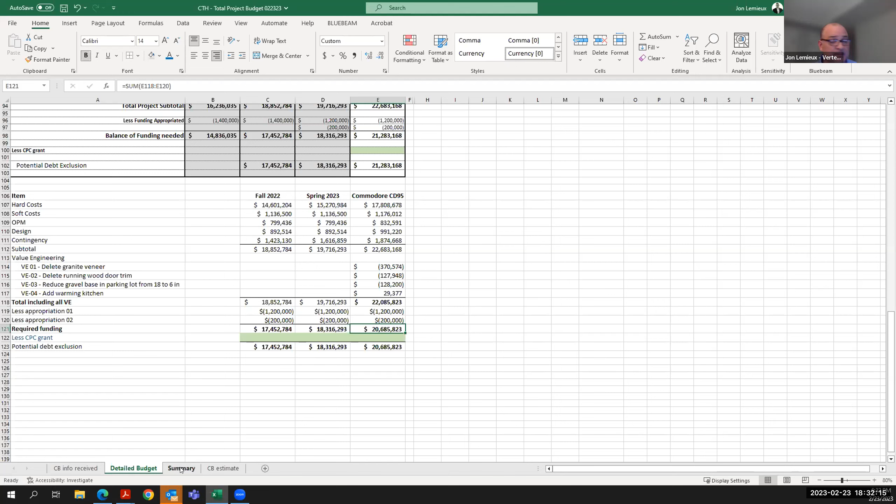So what I'm showing here is what was presented last time to the select board, just for reference. Again, this information is from the prior page. We just went over it, but I want to show you, well, how do we get a number for CPC?

Well, what we told Commodore to do is give us a breakdown, and we have the backup for this. Give us a breakdown for all of the work that is on the historical side of the building, and for items that are shared services, all new electrical, all new HVAC, all new plumbing, break it down by square footage. If there's 40% of the square footage in the old building and 60% in the new, take 40% of that electrical cost and put it with the old.

We're not going to count fixtures and wire, because if the panels are in the other building, the panels serve both. Similarly, if we're housing a big air handling unit in the existing building, and it serves the new building, we shouldn't be lumping that in entirely with the old building, even though it sits there, because it's providing heating and air conditioning to the other side.

So we did the systems of the building by square footage. In doing so, this is the $5 million number that we saw for the estimate on the prior page. That $5 million number is 33% of the $17.8 million construction cost. So the renovation portion of the historical building is 5.9 million.

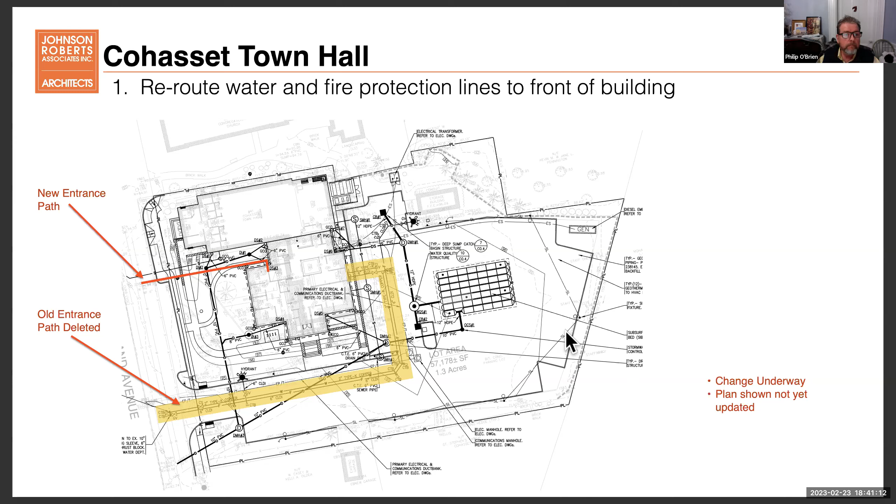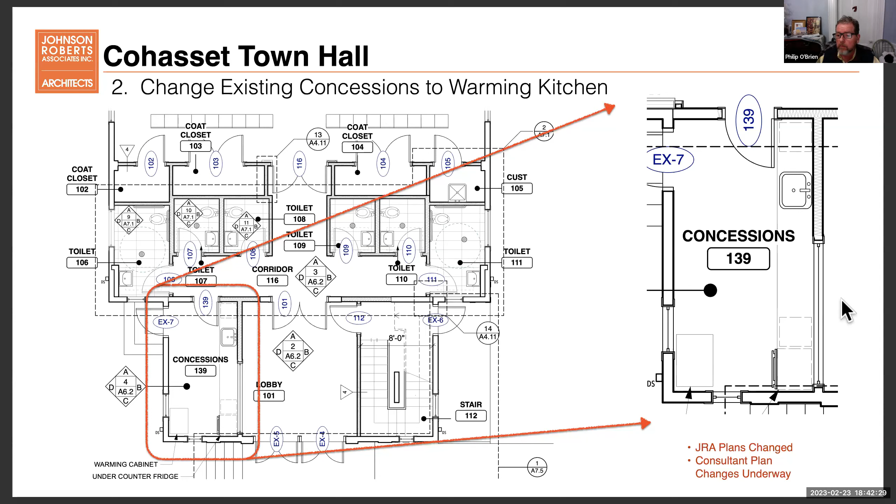This door basically just steps out - we weren't using it as an exit door anyway. It will provide a way for folks working in here, potentially delivering foods and warming things up to service, to sneak in and out this way if they needed to. We've got a sink in there, moved away from the windows, and a spot for a warming cabinet and an under-counter refrigerator. If you wanted a full-size refrigerator, you could put it up against this wall, and we'll have outlets in that room. So that's underway - our engineers are working on their portion of it.

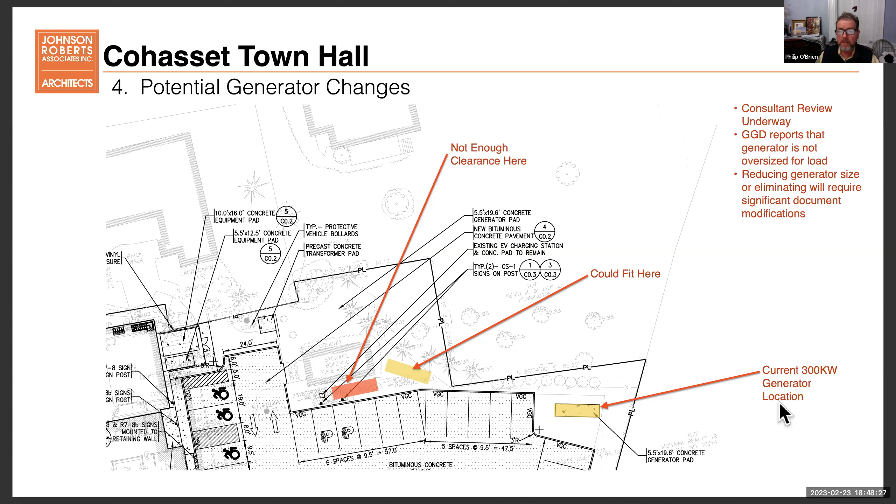They said it's not over-designed, so if we went down a size, it wouldn't make a big difference in terms of the cost. That hasn't been confirmed by Commodore, but they would have to remove some things from the emergency generator and redesign the electrical and emergency electrical systems in order to accommodate that. So that's the response we get from them.

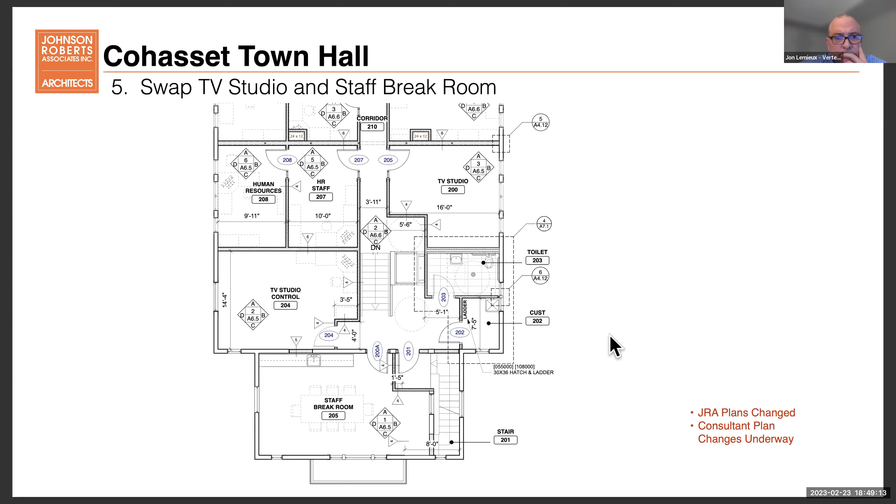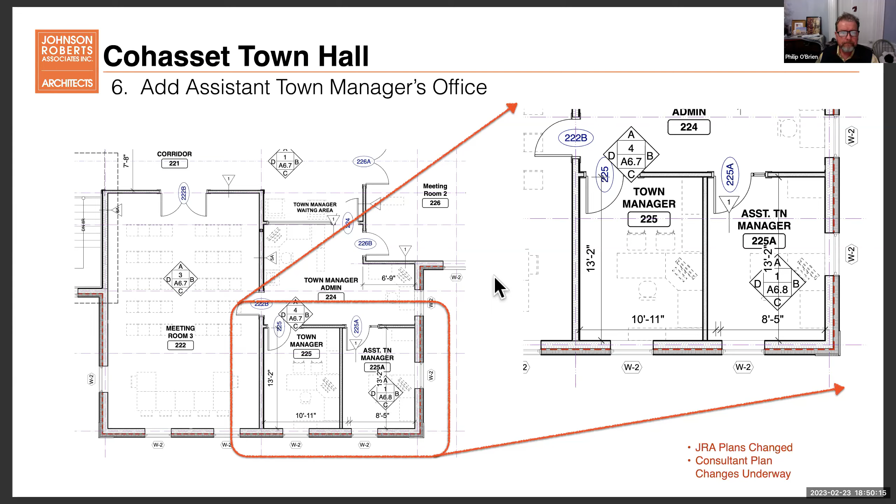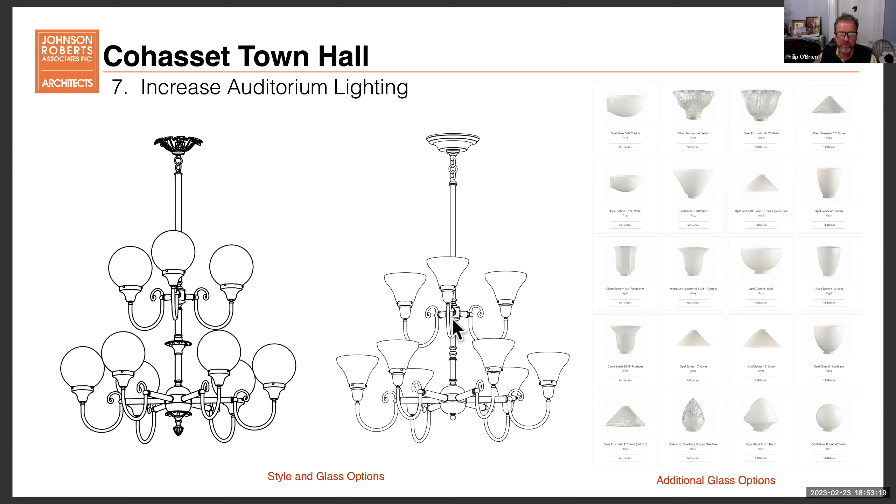I have one more slide to show you the different glass options. One of the nice things is that you don't really need to pick the glass options right now. There's a couple of different style variations, a little bit more fancy on the metal work here, or a little simpler form. They're basically variations of the same thing, and again, they come in a variety of metal finishes, including bronze, which is, I think, one person suggested.

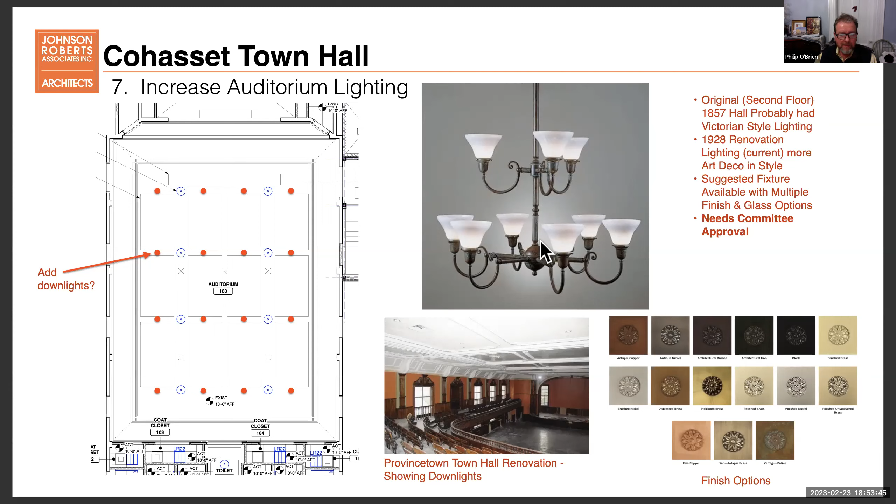And then they have kind of an heirloom brass and a distressed brass. We could get physical samples of those things during the submittal phase to show those to you if anybody's interested. But again, this is one of those things that we need the yay or nay on so that we can get it onto the documents.

John mentioned this one, and we talked to GGD, and we've gone over this before. The idea here is there's your pavement, and the new base shown on GGD's drawing is 18 inches deep. They're saying that based on what they know right now, they could easily reduce it to 12. It doesn't need to be 18 inches, so that was a good catch.

But depending on what's under that existing parking lot, they agreed that they might even be able to just regrind what's there and use that as a base, which would save you more money because you wouldn't need to excavate down all that much other than to change the grade, and you could reuse that material and move it around. So you'd be doing a lot less excavation and removal and replacement if that is possible. We need a little bit of additional information to nail that one down.

These 5 items, I don't have drawings or illustrations to go with, so I've taken them out of order a little bit, but basically John talked about eliminating the granite facing on the foundations. That's kind of a no-brainer. We've done that. The details will stay there, and they've priced it as an alternate, and if everything comes in great and you want to go ahead with it, we'll have the number for that. We'll also have the number for not doing it.

Changing the doors and the locks to keyless entry, we are making the changes to the doors, frames, and hardware. The electrical change is basically box and conduit, the way it is for all of your other electronics, assuming that the electronics themselves will be added at a later date, and we'll have everything there with pull strings so that stuff can be pulled in, just like security and so forth.

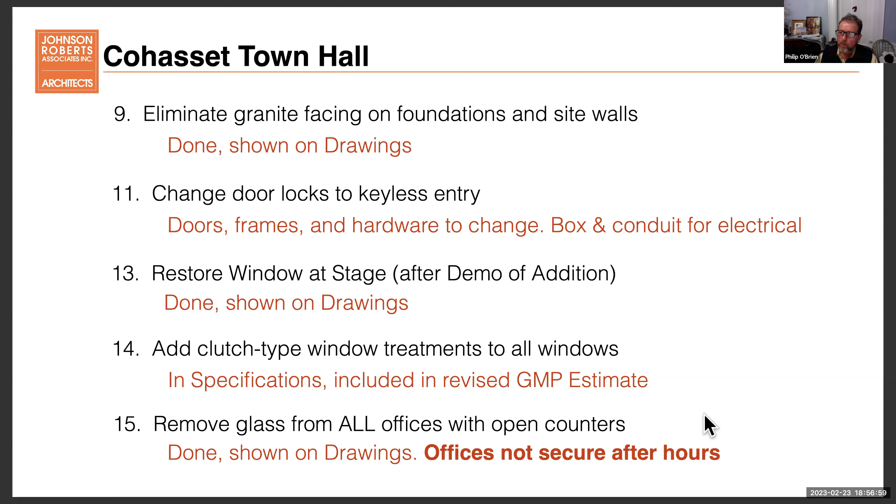Removing the glass from all the offices with open counters. We've done that. I don't know if that is specifically included in Commodore's numbers or not. I didn't know how to find it exactly. But the thing we wanted to point out is that you have a nighttime kind of closure for the rest of the building. But if you wanted to leave the corridors, for example, open in the addition, you don't have security in each of the departments now. Somebody could hop over the counter, in other words, even if the door is locked, if we take the glass out. I just want folks to be aware of the implications. I think we talked about it when we all met, but I know we went over a lot of things, and I just wanted to point that out to you all.

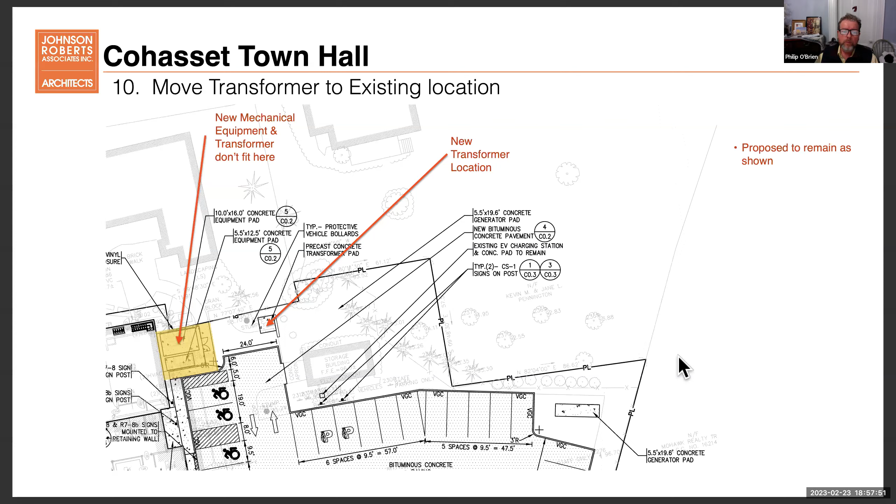The transformer, we asked GGD about moving the existing transformer to a new location. The existing location is actually in the parking area right now, kind of half in and half out. The space we have in that area to potentially move the new transformer over is really taken up with walkways and mechanical equipment. We don't really have enough room to get the transformer much closer to the building. The idea was to reduce the length of the secondaries and save a little bit of cost. We're recommending we leave it the way it is. We just don't think we can realize those costs in an effective manner. Moving the mechanical equipment further away from the building is much harder because of the refrigerant lines and so forth, and that would just mean there wouldn't be any savings, in other words.

Extending the public sidewalk.

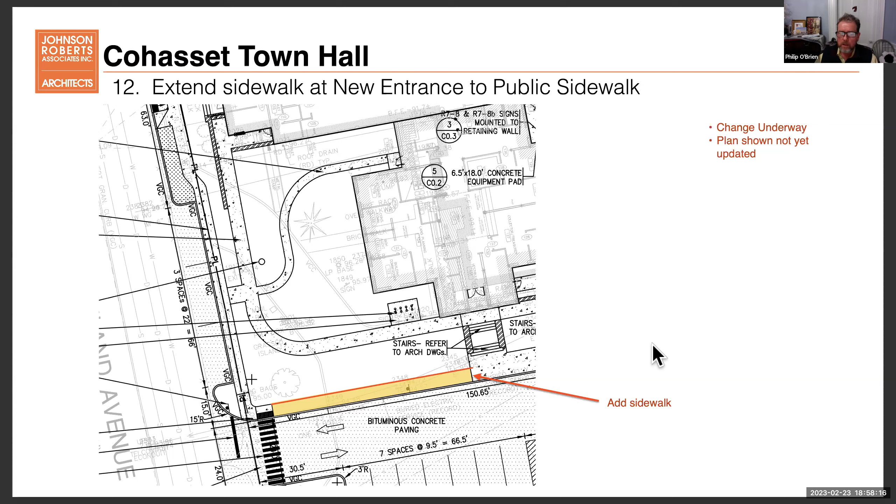The idea here is that if anybody was parked at the back and they wanted to go out to the street, across to the common, we'd have a sidewalk that continues along this part of the driveway to take you out to the public way, so that you didn't have to walk across the grass or in the driveway. We've asked GGD to make that change, and that is underway.

There was a suggestion to remove these little corners on the parking lot. The idea being that where these parking spaces abut these areas would end, rather than having the granite curbing, we'd extend the pavement in there and just stripe these areas so you could pile your snow there. It would save a little on curbing and add a little to the bituminous. So there's a couple of things there.

If we move the generator, we can realize this one. If we don't, then we kind of need that spot for the generator. But we can certainly change this one.

The other thing GGD is reviewing is a modest change in the amount of non-permeable surface on the site. We need to make sure that change doesn't have an impact on the stormwater management system that would make this less cost effective. They're confirming that for us, but I don't have the answer yet. But if we can do it and it saves money, I think it's easy to do.

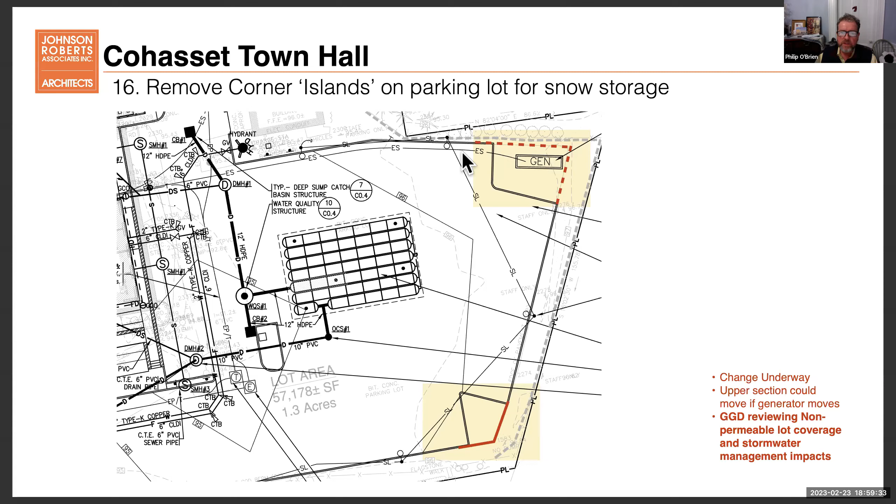And if this generator moves, then this one could be done as well as that one. The last couple of slides here are just a copy of the most updated plans in case we needed to refer to them. And that's the end of my slides.

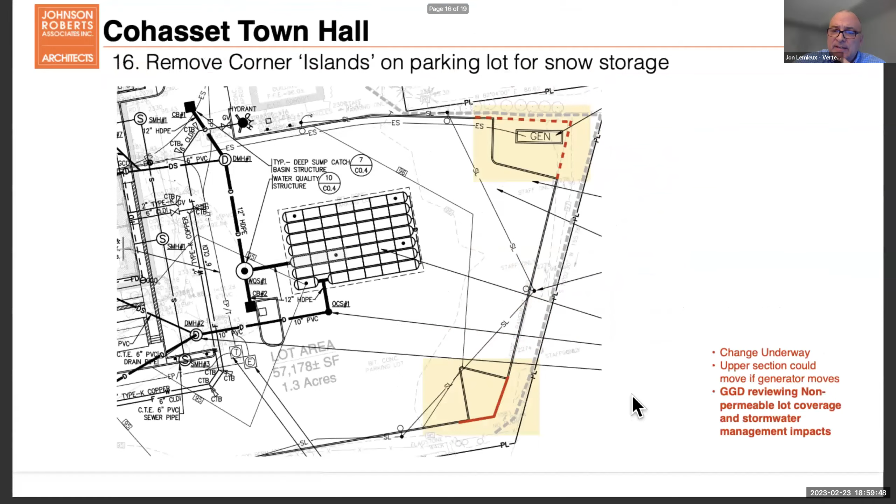Okay, so Phil, sounds like we need to go back for the lights, and we need to go back for the side handicap parking spots. Yes.

So just for my own edification, if you're going to try to achieve the 62-foot run so that you can maintain the slope, can you with a marker show what that does to the walkway we're seeing on the page? Because obviously the radius would have to change, that walkway would start turning sooner, or what's the impact of that? Let's see if I can. I don't see drawing tools specifically here, so I'll try to use my own.

So I think if we end up doing this, the sidewalk probably at a minimum needs to turn at 90 degrees so that we can pick up a little more length. They may suggest connecting these two, but I think the grades in this area are probably steep enough that they would recommend against that. But a move like that, even though it's unnatural to walk on, may give you a little bit of additional length that you need.

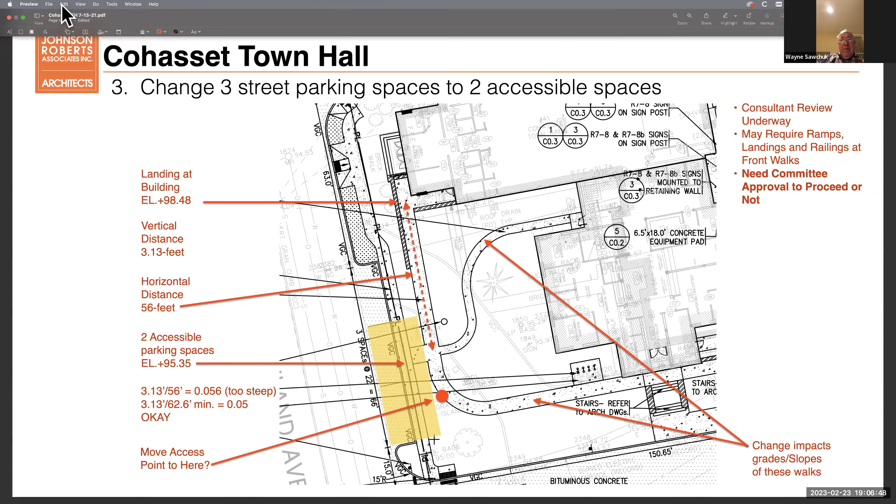Can I make a couple of comments? This is one of the things I was sort of trying to really do. There was a comment made that you couldn't have handicapped spaces on the right-hand side as you're going into the parking lot, because that would not be safe for someone to either back in or drive in. I can't understand that for the life of me - if you took the first 1, 2, 3 spaces inside the parking lot on the right-hand side of the entrance, why can't you make the 3 spots there now?

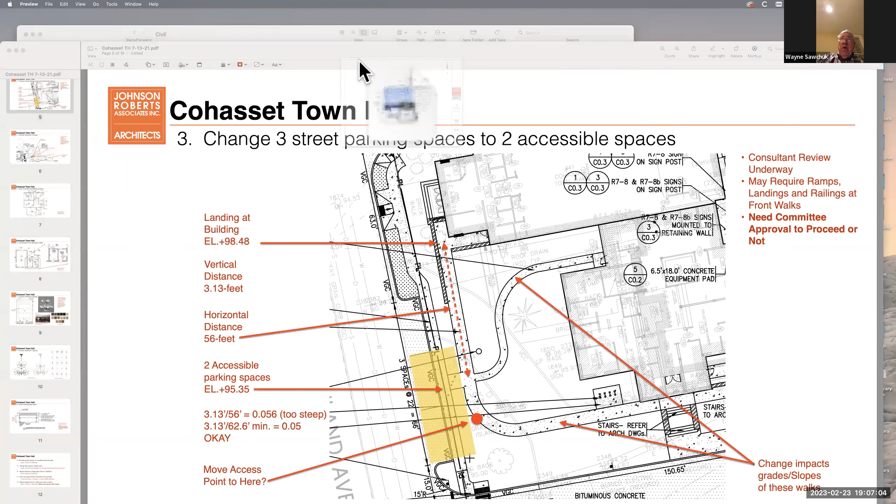And then we will go back to what is out on the street right now, and have your sidewalks go out from in front of the building so that they match where the sidewalk is now. So when you look at the big plan here, why can't you take a couple of those 7 spaces there and make 2 or 3 of those handicapped accessible? Then you're closer to the front of the building and closer to the sidewalk so they can go down and get up the ramp that you have here. You've even hatched the drawing here to allow it as having a crosswalk.

But Wayne, it was your suggestion, you were asking about putting them out on the street. No, I think that's why Phil was - and the engineers went through that, and we talked about it for a while before the meeting inside the auditorium. It was also discussed that we can't have the handicap crossing the lane of traffic there in the driveway.

But how come you can't have that, where you have a crosswalk there? Isn't someone coming down to the sidewalk now? They'd have to walk down the driveway to get to the crosswalk.

Well, maybe you put a sidewalk in there, the one in front of the new addition. I assume you were gonna have a sidewalk along where the fire hydrant was going to be, and match it out to the sidewalk on the other side of that hash mark. So at the top of the hash mark, if you had your 4-foot or 5-foot sidewalk going along there, it connects with everything else you have.

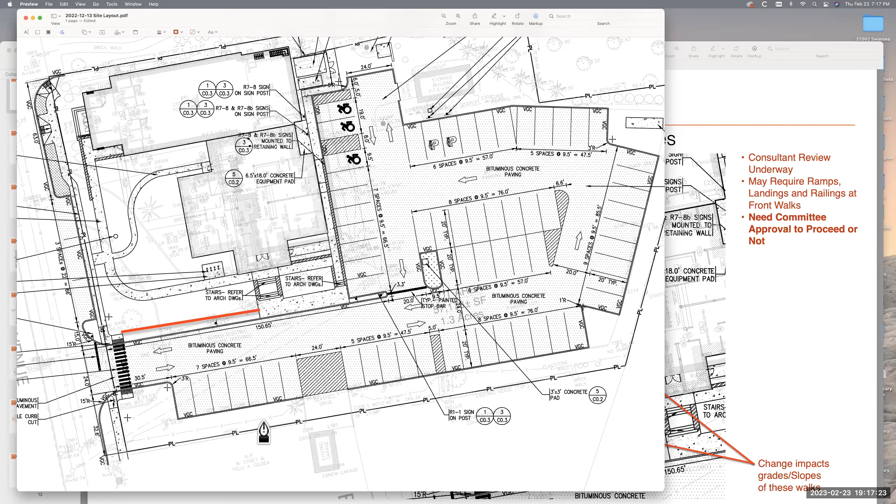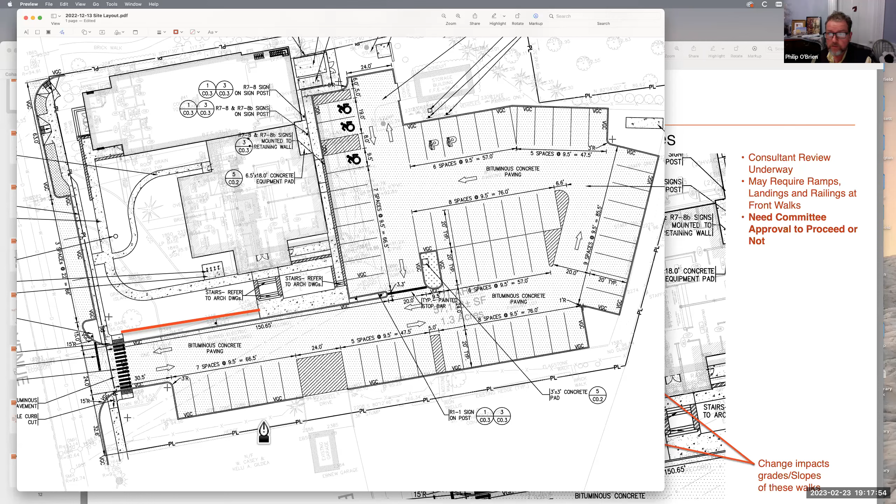So is the committee okay with progressing under this new plan and going forward? Yes, I believe so. You got a couple of seconds there. Okay, thank you. So is that a yes for me? You want me to go ahead with that? Yes. Thank you, thank you.

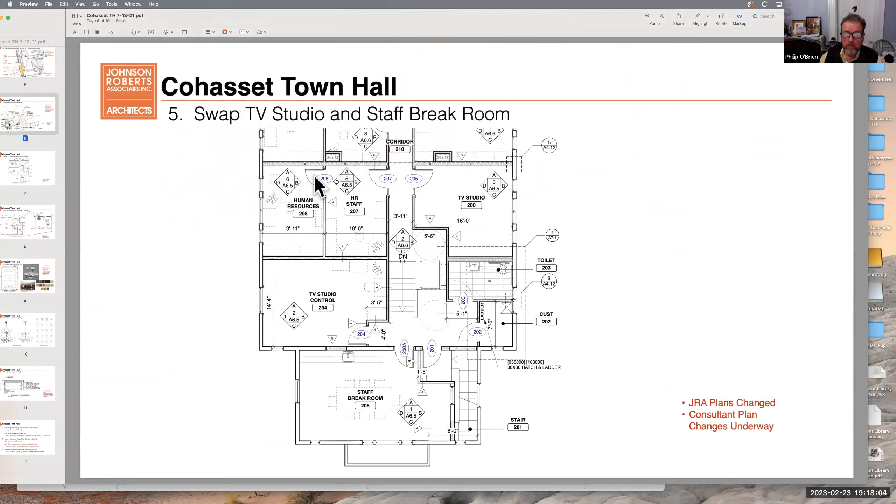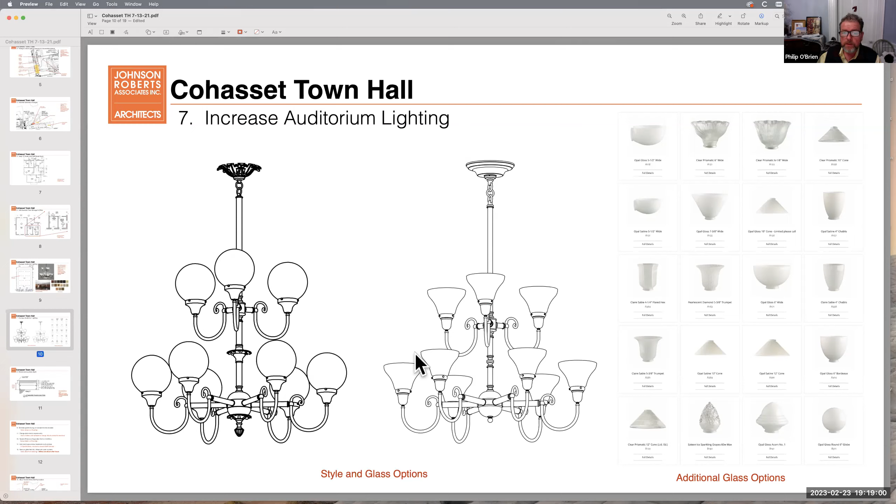So would those be LED? LED, yes. I think 8 chandeliers might, without being in the space, I'm not sure, but it seems like that might be a lot. Right now, as you pointed out, there's only 4 overhead fixtures.

Right, with the assumption you were going to add 4 more in the middle. So what's the diameter, Phil? Of that fixture, just to give folks an idea of size. This is a little bit over 3 feet. Again, it's not a monster, right? But it is bigger than the light fixture that's up there, which is probably about 18 inches across and is not pendant mounted, surface mounted.

I'd have to say I like the idea of the downlighting. I do like the chandeliers. They do become a problem trying to keep them clean or making them look nice. The downlighting would be recessed lighting. I assume you wouldn't see any of the fixtures. That would be a hidden light that would make it look more wide open. Kind of like that idea.

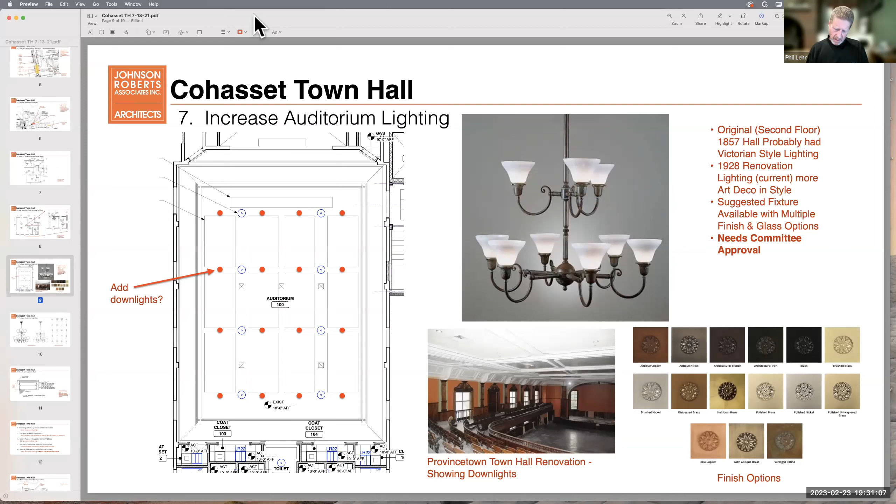I'm with you. Got enough on that, Phil? Yeah, I think I have the answers that I need. Good. Did I forget anything, Natalie? All right, thank you.

So guys, that's what we had, and that's what Phil had for tonight. I think you can finally feel the snowballs are rolling. We are moving, we are in the process of pre-qualification. We received the responses back. We unfortunately only got one interested fire protection firm and one interested elevator firm.

Elevator, not surprised, happens all the time. Fire protection, we advertised again, belts and suspenders. Basically, we have guidance from the Attorney General that will allow us to go non-trade with that, meaning we can open it up because of only one response, since it's CM at risk. We need to confirm this, but give it to the CM to go find and bring firms in themselves to do it, because we only have that one number, but we need to confirm that.

But 5 or 6 electricians, 5 or 6 HVAC, 5 or 6 plumbers, so we got good coverage on the rest of the scopes, and we're reviewing those now and checking references and whatnot. Phil and Mark will be in touch, because we're going to need to have a meeting at some point in the very near future to update on that stuff. And we need Commodore involved too. Commodore, this week, huge vacation week for them, and their estimator has been answering questions while he's been on vacation. He's been wonderful.